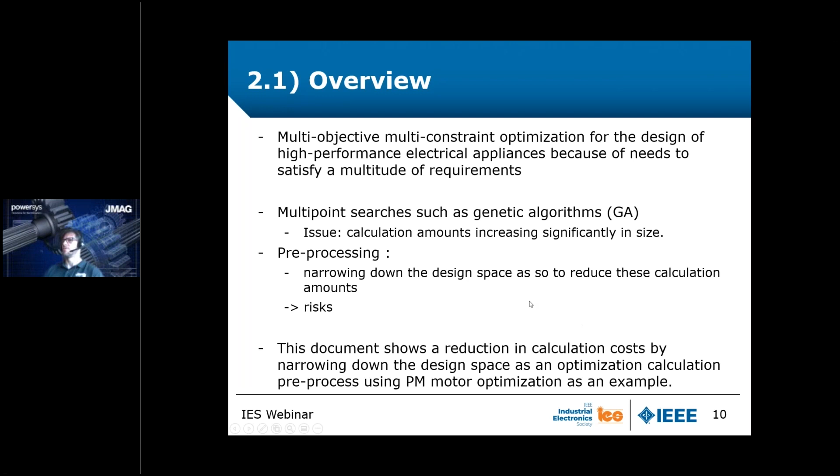So we will see that through an example, permanent magnet motor optimization. That will be our example. So let me show you this motor example. Here is the motor model. So we will make it simple. In that case, only one magnet. And here are all the dimensions we are going to optimize.

So I'm not going to detail everything, but here you can see slot opening, rotor, radius of the stator. Then you can see the magnet width, and also here some space between the magnet and the rotor border. And so here you've got the list of all the design variables. So those are very classical ones, based on classical motor design.

And here you can also see the maximum range that could be used in that motor. And we will see how we can narrow down those ranges here. Let me now introduce the objective function. So still here, it's a kind of classical design for motor. So we are going to maximize average torque, minimize torque ripple, maybe to reduce noise and vibration. And of course, we will try to minimize the loss so that we will increase the efficiency.

Regarding the constraint conditions, in order to make it feasible, we also have something to apply here, like voltage limit. So we are going to check back EMF voltage. We are going to check the stress also in order to prevent damage from centrifugal force. Of course, we will also check the volume because we've got some constraint here.

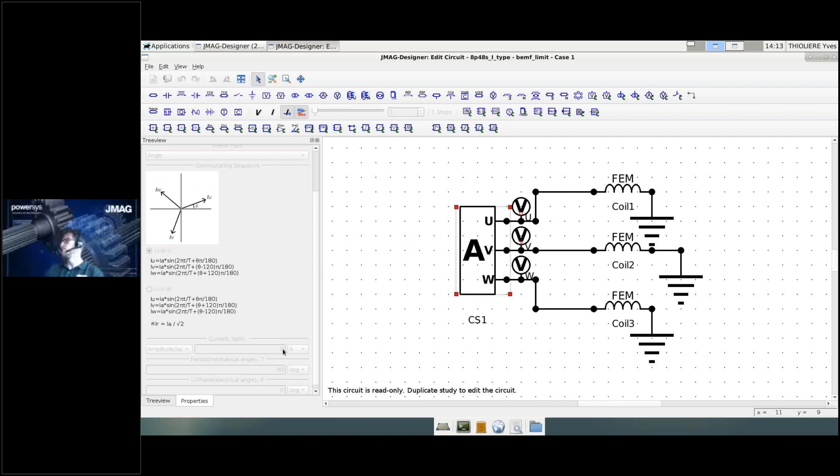So for example, if I edit the circuit, you can see that now I have a current source with 0 current here, so no current. And I'm going to check voltage here. So that's a very classical voltage check. And you can see also that we have here some response graph data checking the back EMF, so checking the voltage.

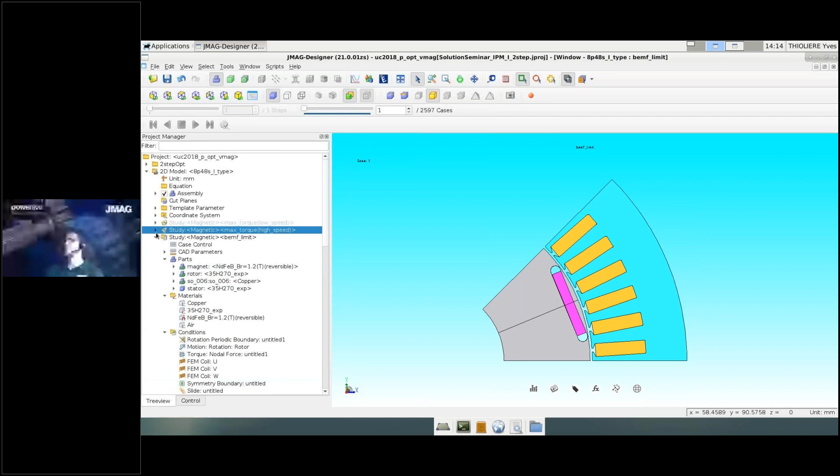We've got one other study, which is for stress. So here now you can see that only the rotor is applied. Here we are also making some response graph data about stress, max stress. So if you check here, edit, we are checking stress and maximum stress.

And that's all our studies, and it's very easy to create those studies, because you can reuse the previous one and change the speed and the current, etc. You can create all your response data, and you can create this analysis group. So you see that in my group, I have all the previous studies I have shown. And in the response graph data, all response graph data coming from all studies are collected here.

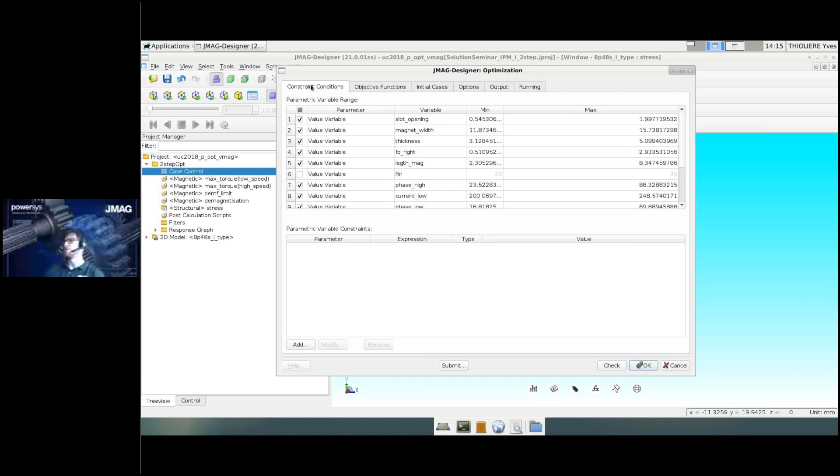So you can see this stress, I showed you back EMF, and of course we've got the ones I did not show you, like average torque for high speed, etc. And on this group, you can directly go to the optimization and place your optimization function directly here. Here first, of course, the constraints with all the ranges, and then comes the objective function. So you can just place there the objective function based on the expression of the response, minimize, etc.

So here is the model. Here is what we are going to play with now in the slide. So let me go back to full screen. So now I presented you the model. I've shown you how I implemented that under JMAG. Let me show you the results.

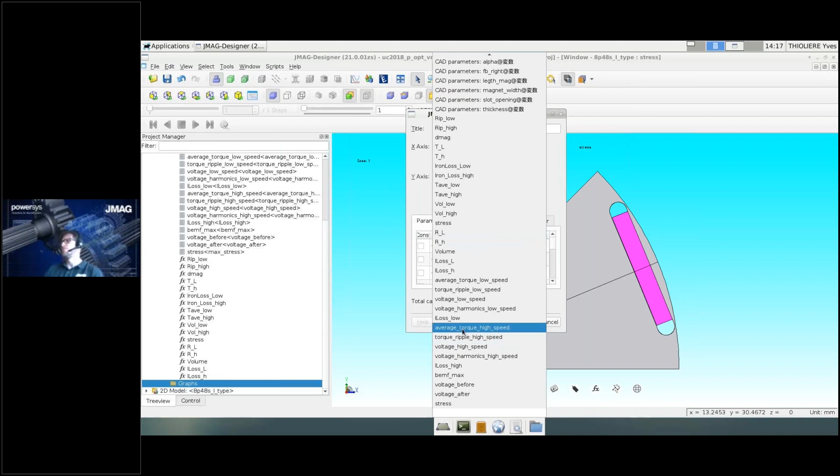So here also in JMAG, you can access all the response graph data and create your graph directly by generating. So for example, you could have all the response graph data that are here, for example iron loss and torque, average torque, high speed. And here you can very easily generate that kind of graph.

So now the question is how to reduce this amount of calculation by getting more solutions in the feasible area, and also updating the Pareto front more quickly. So what is proposed here is to make a two-stage optimization. It means that we will just run one stage, check the variables, check the range of the variables and how they evolve, and use this new range in a second stage. So it means restarting the optimization.

And so we will see that at the end of the first stage, the first stage is in fact five generations of the optimization, and you can see that for this particular variable, which, if you remember, is the distance between the magnet and the rotor border, the range is going down. And you can imagine that you could do that for all variables.

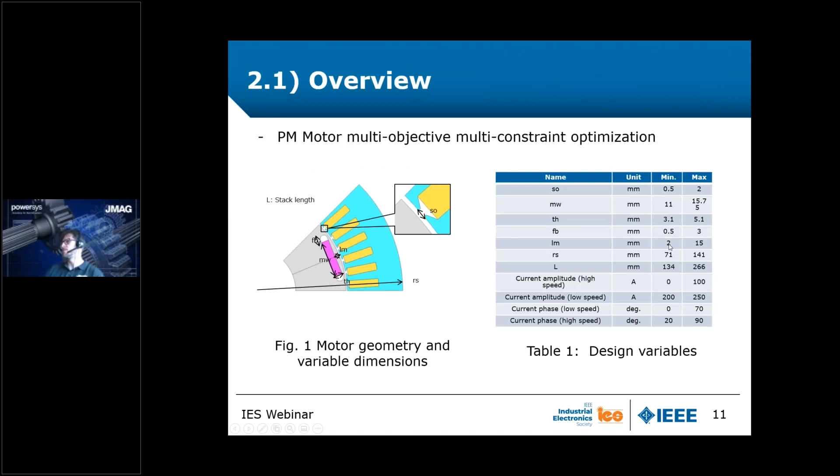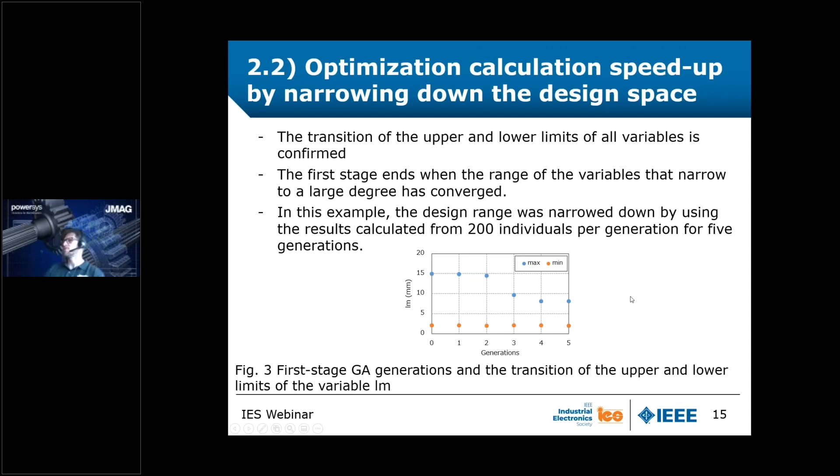And it means that at the end of the first stage, you see here it's maybe 15, here I remember it's 2. If you go back to here, we are for LM at 2 and 15. So we use the full range, but now for the second stage optimization, we will maybe go from 2 to 8, and that will be our second stage of optimization.

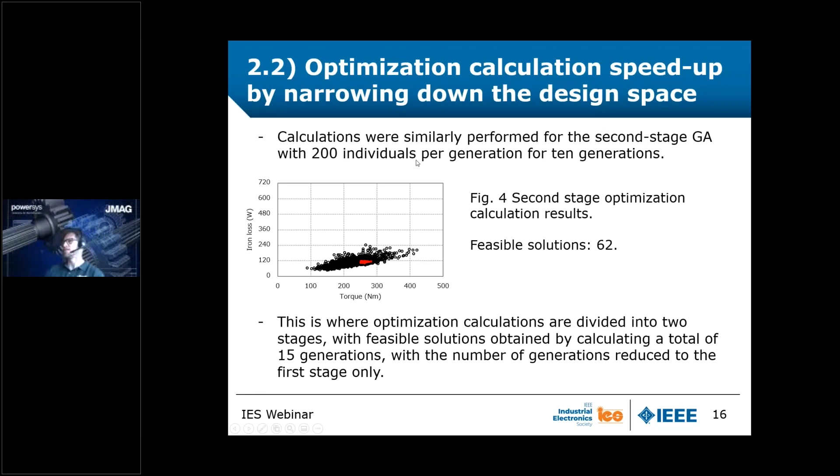And at the end of this second stage, still 200 individuals, 200 calculations per generation, you can see that we've got many more calculations close to the feasible area, and we also update the Pareto front more quickly. The results are not spread away like this. They are really near the Pareto front and really near the feasible solutions. We have fewer solutions, but it's also because we have fewer cases.

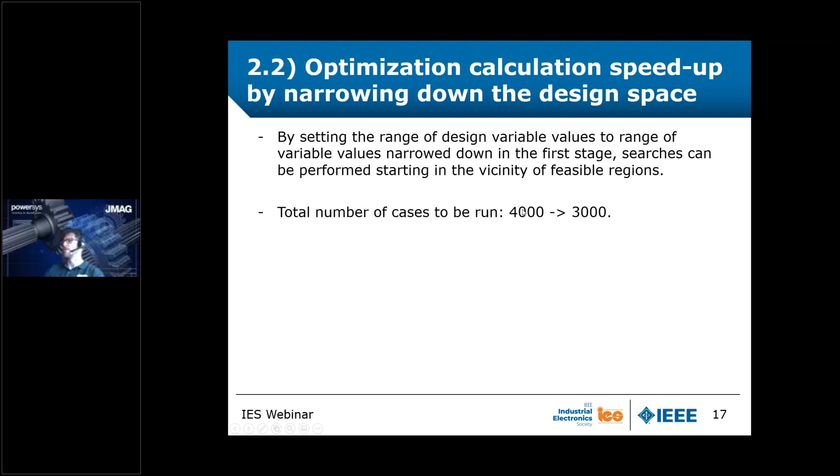This second stage is only 10 generations, so in total 3,000 cases instead of 4,000. So we have reduced the total number of calculations by 1,000, and we also have an optimization which is converging quicker because all solutions are near the Pareto front. Maybe if we ran 20 generations at the second stage, we would get more feasible solutions, but the goal here isn't to get more feasible solutions, but to update the Pareto front more quickly to speed up the convergence of the optimization.

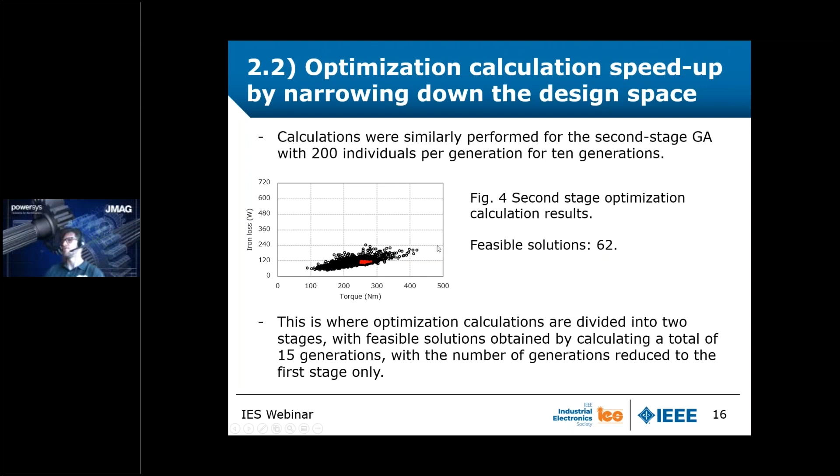So this was by using a finite element calculation. However, you know that finite element calculation is maybe a bit long, so some other techniques could be used. For example, we are now going to use the genetic algorithm using an equivalent circuit model, and we are also going to use the experimental design method using an FEA model. The advantage of this is that the calculation amount is smallest because it's a kind of sensitivity analysis.

We can also have high model detail because it's based on FEA calculation behind, and we can take into account all objective functions. The disadvantage of the equivalent circuit model is that the model detail is low because it's an equivalent model. The objective function is also limited. We cannot implement all objective functions, like torque ripple. The advantage, of course, is that the calculation time is very quick.

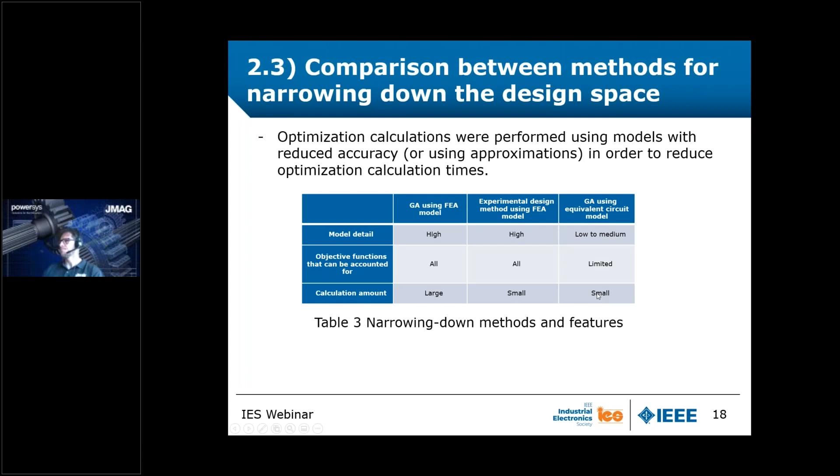So as I already said, with the equivalent circuit, we can investigate high speed and low speed, but torque ripple, voltage harmonics, stress, and demagnetization cannot be taken into account. So what we are going to do is use those new techniques for the first stage only. The second stage will still be the 15 generations, 200 cases, using the full finite element solver.

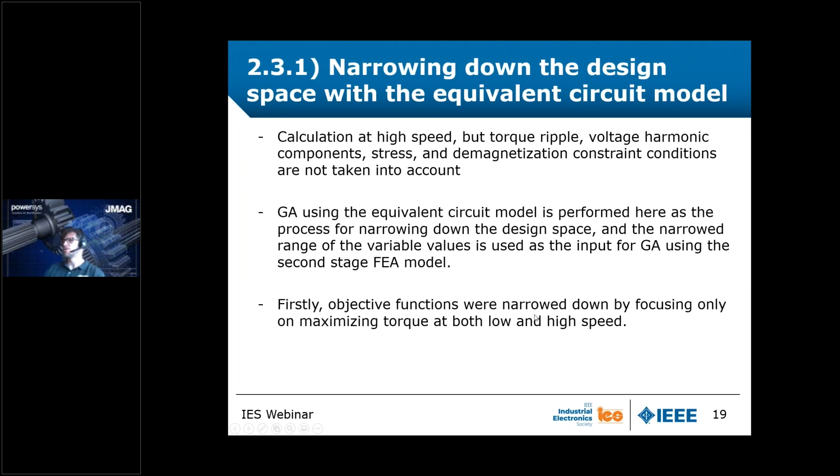Okay, and now we are going to see this equivalent circuit model, okay? And firstly, we will just focus on maximizing torque at both low and high speed. Okay, that will be our only objective function. Okay, and by doing that, you can see that we've got 0 feasible solutions using this equivalent circuit model.

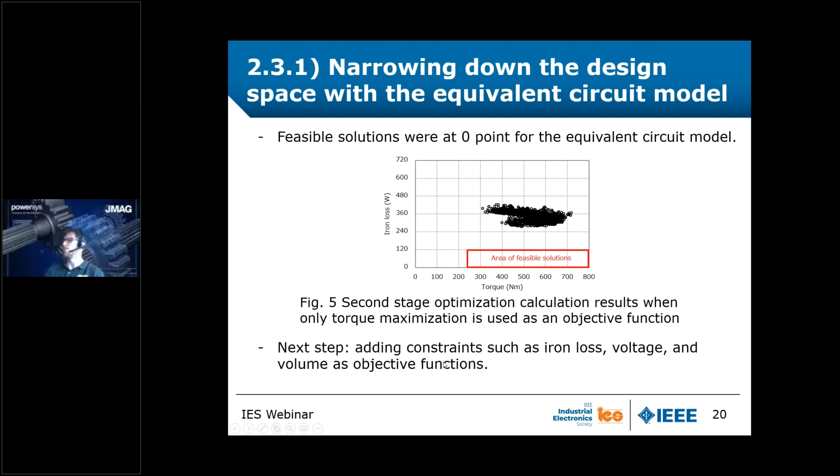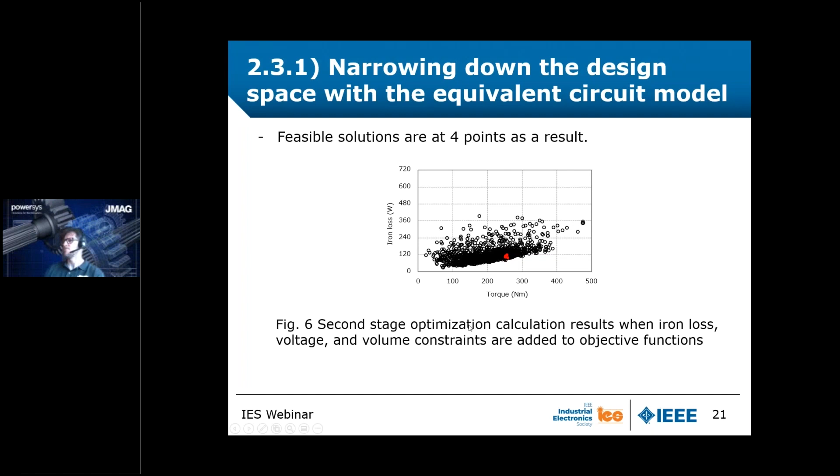So that's why we have very few feasible solutions, because in fact in the first stage the narrowing down is not performed correctly because some constraints are missing and some model details are missing.

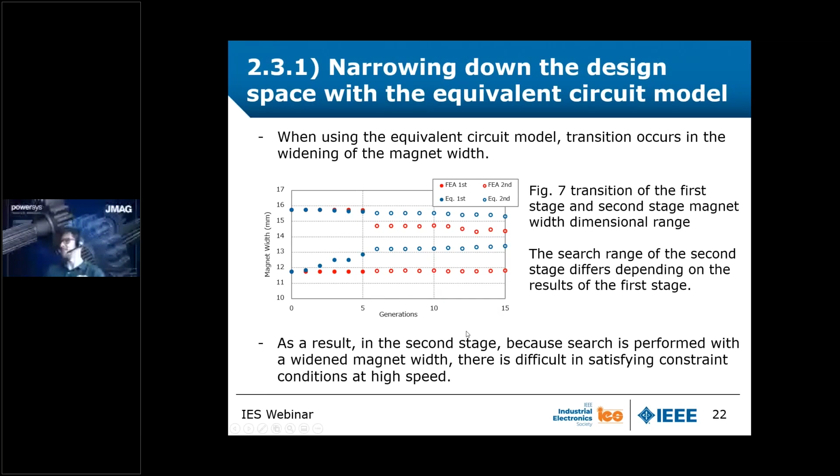The next one will be narrowing down using this experimental design method. So I will make it shorter. It's based on some Taguchi techniques, and it's more or less some sensitivity analysis. This is based on sensitivity calculation. Okay, and the good point is that you can use the full finite element solver behind, and you've got much less calculation to be done.

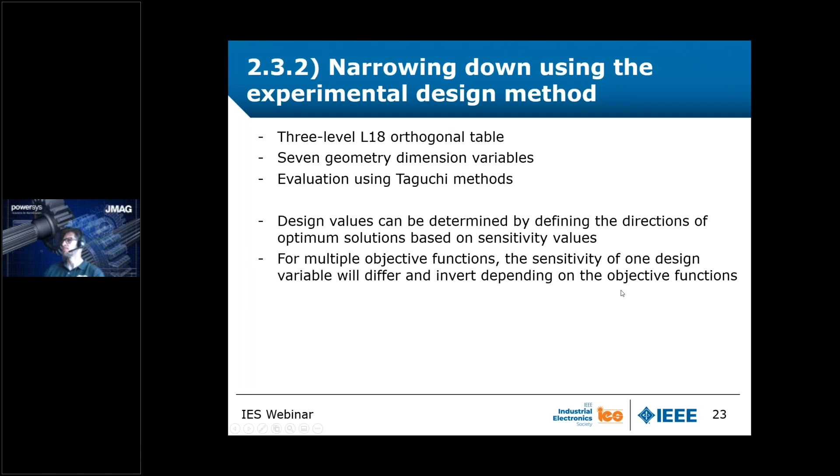The disadvantage is that the sensitivity for one variable could be completely different and also inverted depending on some objective functions. Let's take an example of this variable, still the LM. If you remember this variable, that's the distance between the magnet and the border of the rotor. And now we are checking the sensitivity of this variable. So here is this variable.

We are checking the sensitivity of this variable regarding the torque ripple at high speed and the average torque at high speed. And indeed, you can see that when you are here at, let's say, a small value for the LM, the torque ripple is increasing. But also, when we are at a small value of the LM, the average torque is also increasing.

So it means that if we would like to maximize torque, we will have to be maybe here in that range. Maybe I can make a small drawing here. So we need to be here in that region. So it means also here in that case, and it means that now we are not going to reduce the torque ripple but increase the torque ripple. So it means we have to prioritize, and no single decision could be made. And here again, the narrowing down process is a bit critical, depending on the prioritized objective functions.

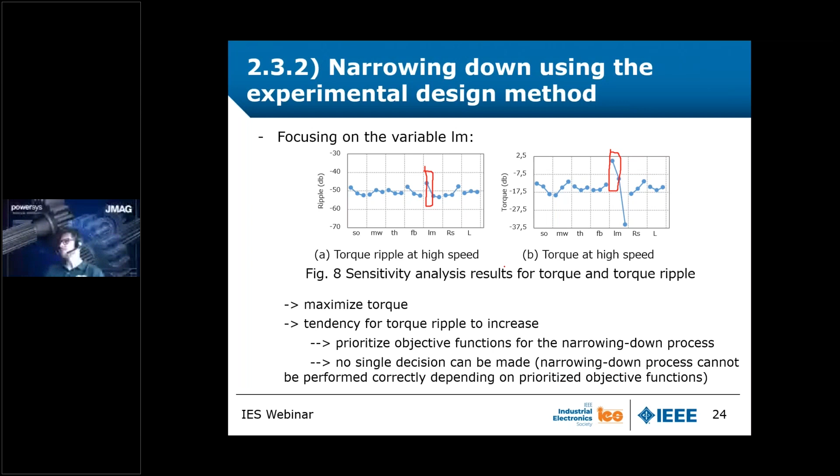Let's have a look, for example, if you prioritize iron loss minimization at high speed. So prioritizing minimum loss at high speed means that here you see the loss, right? Okay, and here you can see that we need to select only this range for all the variables. And then after the second stage, you see that we get some solutions that are completely outside of the feasible solution.

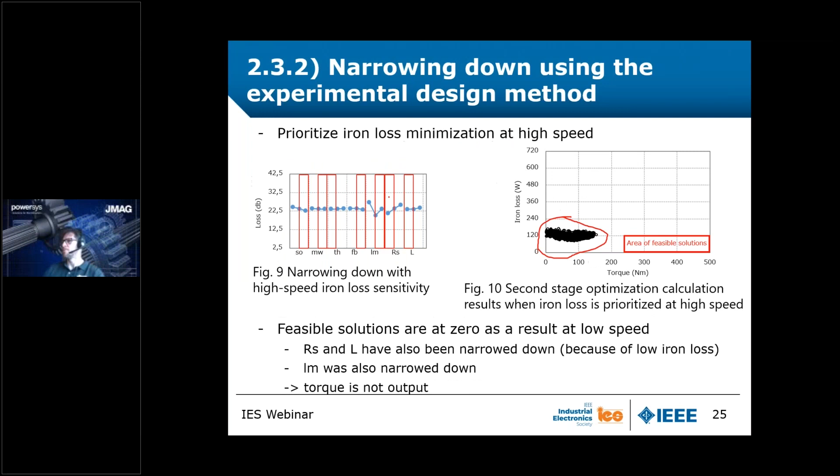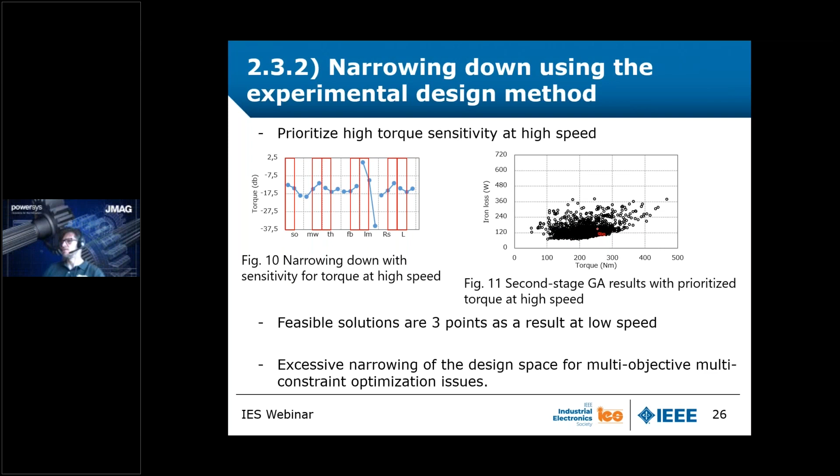So this is also not good. Let's take another example now: prioritizing high torque at sensitivity, high torque at high speed. So you can recognize this picture, which is the same as the one I showed previously here. Okay, so now we will focus on this region here, because you see that torque is high. So we will reduce the range like it's highlighted in red here. And now you see that using this, we have 3 points in the feasible area. So here also we can get some points, but it's not easy doing that.

Here is the cost calculation, and the summary table, which is summarizing everything. So here you've got the initial one. This one is first stage only, I mean, one single stage only. It's the first slide I presented: 200 cases, 20 generations, so 4,000 cases in total. Here we've got in total 5 generations plus 10, so 3,000 in total, and we've got a nice amount of solutions.

And then here come the 2 other methods we have seen, and you see that depending on the narrowing, we could have 3 or 0 or 4 or 0, so it's really not easy using those methods. Using full finite element calculation will be, I think, the best one, and we can get a nice amount of feasible solutions in the correct area. We also have significantly reduced the number of cases and the calculation time.

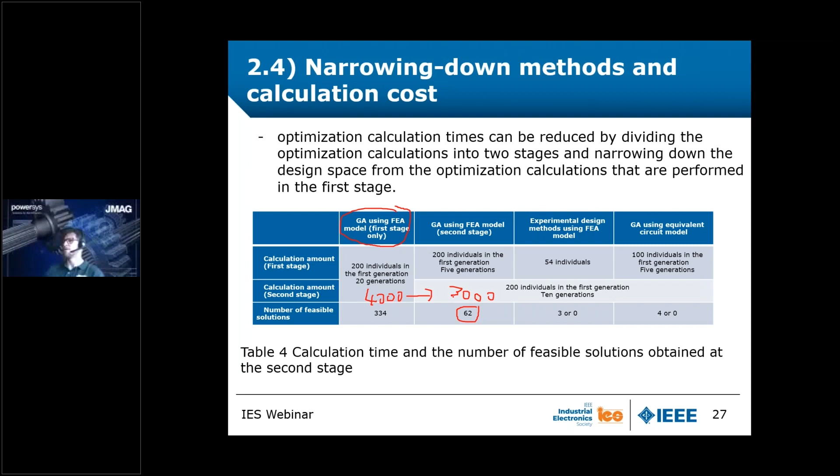So as a summary, indeed, using the equivalent circuit, maybe you are excessively narrowing down, and so no solution. With the experimental method based on sensitivity, maybe you also are not going in the correct direction, so narrowing down is not performed correctly as well. So using a genetic algorithm with the full finite element method at the first stage and second stage, calculation cost is indeed a concern, but with some parallelization on HPC, you could achieve nice results for multi-cases in a reasonable amount of time, and you also get many solutions in the feasible area.

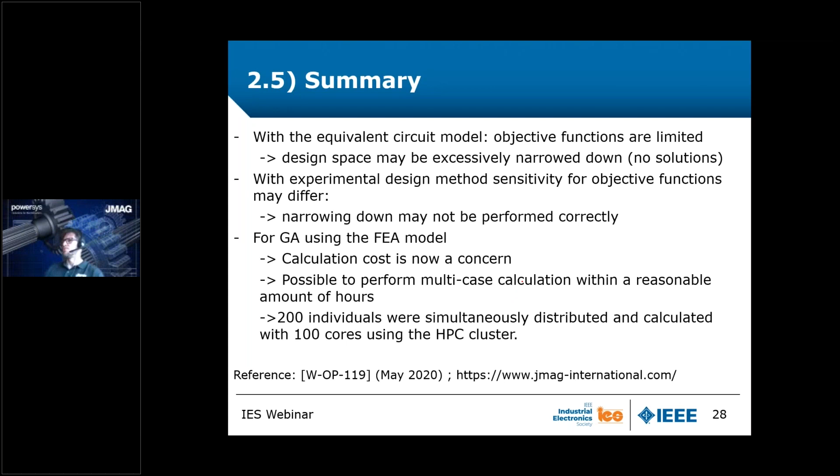Now we are going to part number 2. We will go into more details and case studies, and we will talk about topology optimization, which is also a bit different.

Yes, thank you very much, Yves. With your first part of the presentation, you made my life much easier than I was expecting, so I can directly jump into the case studies. I think you see my screen fine, and you can hear me, and hopefully see me as well. Yes. Great.

Okay, so following the case study and the basic methodology presented by Yves, I will start with 2 case studies that are still using this parametric kind of optimization, still using the genetic algorithm. And after that, I will show you a case study which moves a little bit from parametric optimization more toward topology optimization. In this case study, we focus on the NVH aspect of electrical machines. To give you a little bit of background on the design process that we go through here.

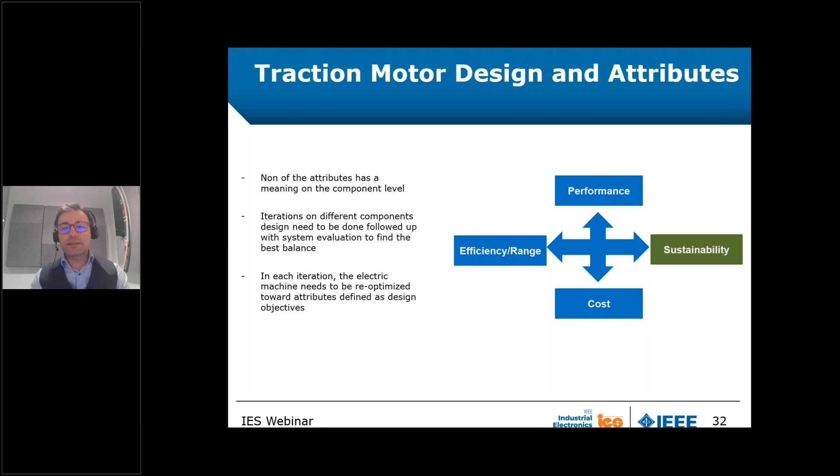Basically, what we are trying to do with this design process is to find the right balance between performance, efficiency of our product, which influences the range of our vehicles, the cost, and a parameter that is getting more and more important, which is sustainability. If we focus today on sustainability, we have some specific parts and components in the electrical machine that have more negative impact on the sustainability of our product.

So that's why in this presentation, I'm going to show you 2 case studies where we made the design. In the first case study, we tried to reduce the amount of rare earth permanent magnets, and in the second case, we tried to replace the copper hairpin with an aluminum hairpin to again improve the sustainability of our product.

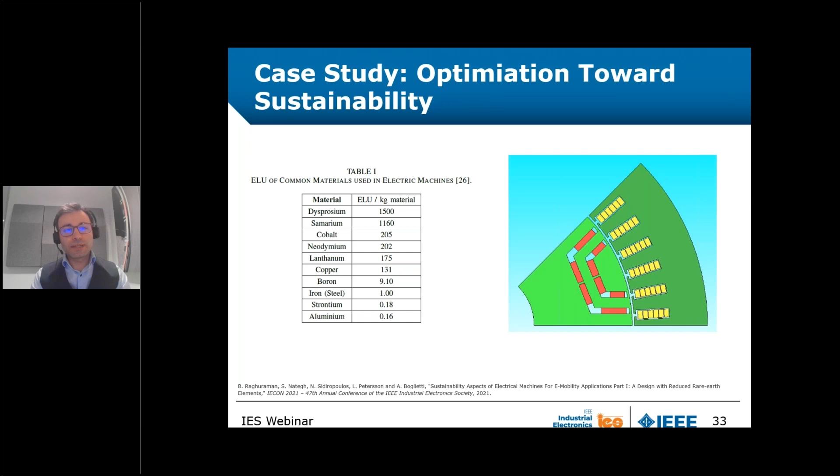Let me show you a little bit of the process we go through. Our whole design process is made in JMAG, but we use different JMAG products for different reasons. Normally we start with initial dimensioning of the motor, and that's normally done in Express, but that's not the only application of Express. We also use Express to have a start point for making the design template that we want. So we get the design template, which is normally fully parameterized, from Express, then we put it in JMAG and further customize it for the kind of optimization that we are going to run.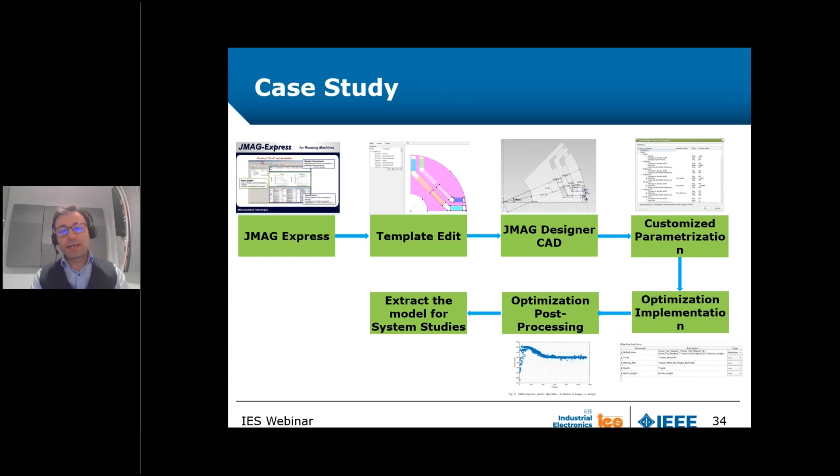This further customization can be to fix some parameters, or, most of the time, increase the number of parameters that we would like to vary during the optimization process. Then we get the parameters that we want to have as constraints and objectives, list our objectives, run the optimization based on a genetic algorithm, and then make the Pareto front, the process that was very well shown by Yves. So let's look at the first case, where we are trying to reduce the amount of rare earth magnets or rare earth elements in the magnets.

The rotor topology normally used for reducing the amount of magnet and replacing at least part of the rare earth magnet with, for example, ferrite. There has been a lot of development on magnets without or with a minimum amount of rare earth elements, but here for simplicity we just go for something well known, which is ferrite. This double layer U shape rotor topology allows us to have different magnet types in the center and on the sides, and that is helpful. If you compare it with the V shape, one layer or two layer, if you make them different, it will create an unbalance between the flux on the two sides of the pole, and that's going to be problematic.

So this rotor topology fits very well when we try to reduce the amount of rare earth magnet in our design. During the optimization, we will focus more on meeting the performance requirement at high torque. Then we have the efficiency points that are more towards lower torque and mid-range speed, as you can see in the graph at the bottom, which shows the real operation of the electrical machine inside the vehicle. You can see it rarely goes to peak performance. So this region shows where we should do the optimization toward efficiency.

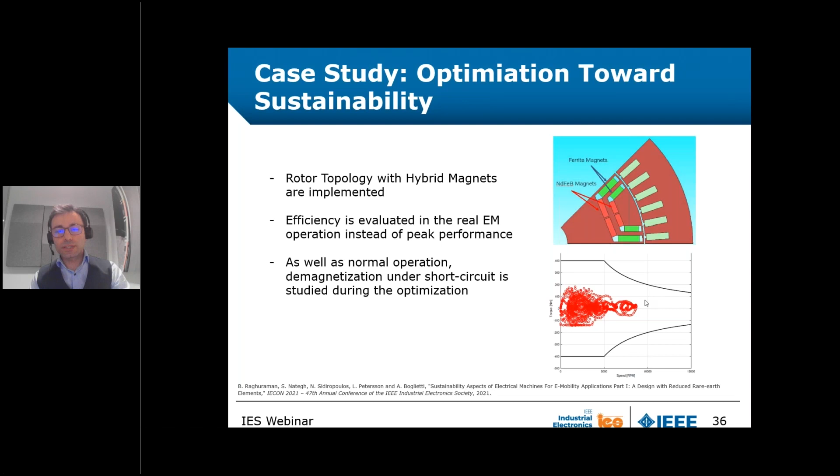So this is not really the full list. Normally we work with a much higher number of objectives, but this is representative for this case. If I increase it more, it can be complicated and a little bit harder to follow. So this is an example. So we run the optimization here. This is an optimization with something like 1150 cases.

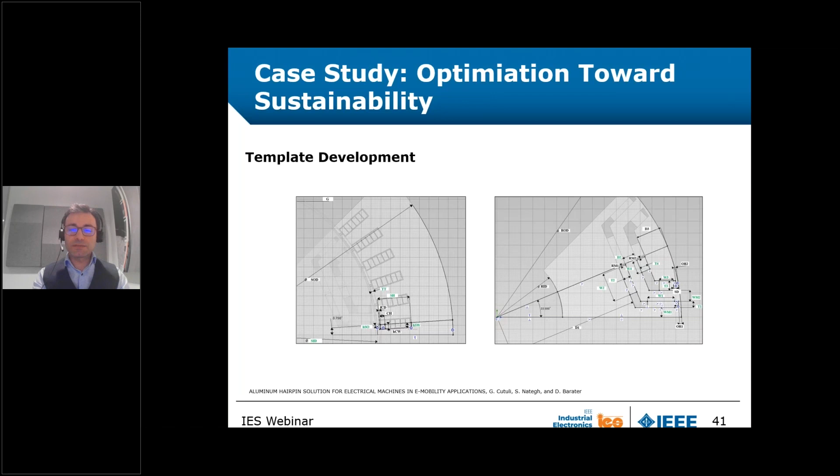We put the objective. The objective will of course be different here, because it is very important for us to keep the current density in the slot below some level, because we know if you have the same current density in the aluminum hairpin as in the copper hairpin, you are going to produce much more losses. So that's why we need to control the current density. Then we try to minimize the total losses, which is the sum of the joule and iron losses.

We would like to meet the voltage requirement based on the state of charge of the battery, for example, and the level of power that we want to get. And we would like to meet the torque requirement, and we want to minimize the amount of magnet at the same time as replacing the copper hairpin with the aluminum hairpin.

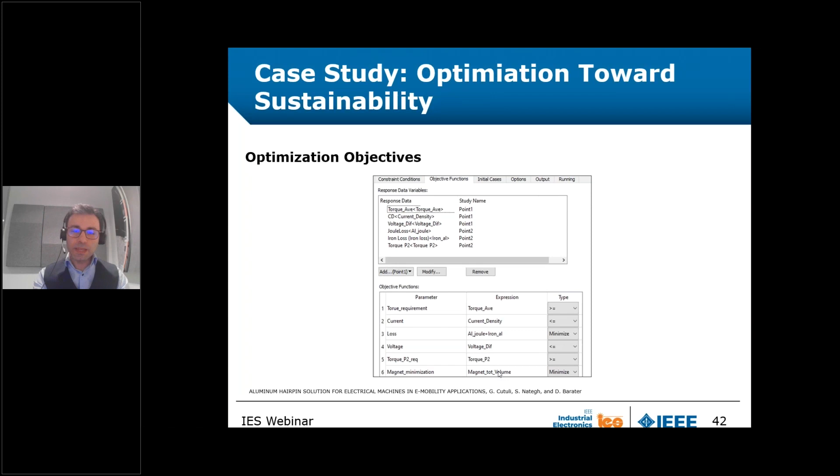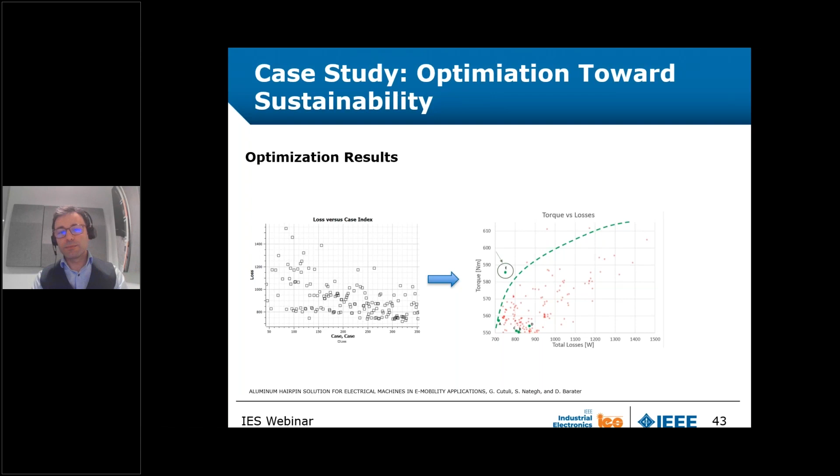You can see the same optimization process is run. In this case, we didn't really need to run it for a very high number of cases. This case shows something like 350 cases, much less than the case I mentioned before. And then we made the Pareto curve, and we tried to find the most optimum design that we felt comfortable with. We could get the design that we want.

So normally after this optimization, you run some smaller optimizations with a lower number of cases to further optimize with a smaller range of the constraints. But this shows the design that has been achieved in this case. And then there will be a study on the system level, together with the amount of current, for example, that you need for the design, to get the sustainability and LCA picture of the whole system.

In this case, it may not be very successful because, as you can see, the amount of the magnet was increased, and that actually killed a lot of the benefits that we had by reducing the amount of copper. But in terms of the optimization, it went pretty fine.

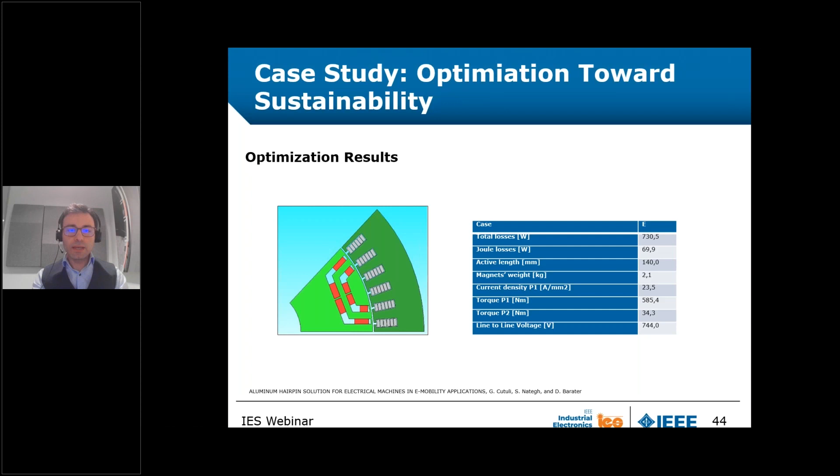Now, these were all still on the parametric optimization level. Now I'm going to show you a case where we move from parametric optimization to topology optimization. And normally that's the process we use when we go deep into the detailed design of the motor, when the concept is finalized and we are going to do the detailed design of the machine.

When it comes to detailed design, you need to fix all the barriers, because we know small changes in the barriers will influence the tooth forces in the stator, for example, and that will generate noise in the machine. So in this specific case, we didn't have much possibility to redesign the whole machine, but with minimum possible changes, we wanted to improve the NVH and the noise level of the electrical machine. The reason was that the electrical machine was already on the vehicle and we couldn't redesign everything.

So just a little bit of background on topology optimization. What does it really do? Topology optimization is used when you really have difficulty doing the parameterization.

Imagine you want to optimize one barrier, for example, in the whole design. Depending on what kind of parameterization of that model you have, you will still limit some design possibility. So that's why, instead of selecting some part, fully parameterizing it and letting it run in the optimization process, in this topology optimization we just select the area that we want to optimize. And then we let the software give us ideas on the best possible design for that barrier.

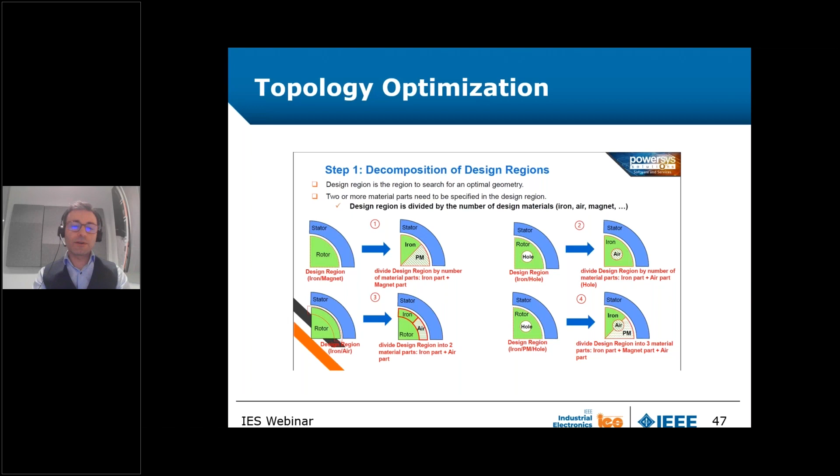The way the software works basically is that for that specific area, it will pick up elements, and with some level of resolution, it will exchange the material with air for different combinations, and it tries to find the most optimum shape of the barrier. This is the case study that we had. As I mentioned, we wanted to keep the same rotor and stator lamination because maybe the tooling was ordered. It's quite an interesting case.

The only possibility that we found to improve the NVH and the level of the noise in the machine was to change the shape of this central barrier, as you can see here. This is the original shape of the central barrier. When we did the detailed analysis of the noise from the machine, what we learned was that the order of the tooth force originating that higher noise is order 48. We know this is an 8-pole machine with 48 slots, so order 48 plays quite an important role here.

So we needed to set some objectives and constraints around this optimization. As I said, the motor was already produced and already on the vehicle, so we couldn't change the performance much, so we limited the change in performance to maximum 1%. Then, in the second objective, we wanted to minimize the value of the 48th order harmonic on the tooth force. At the same time, by reducing order 48, we didn't want to compromise on the other orders, so we wanted the sum of all the important orders, which can be 8, 24, 48 and 56, to still be minimized as well.

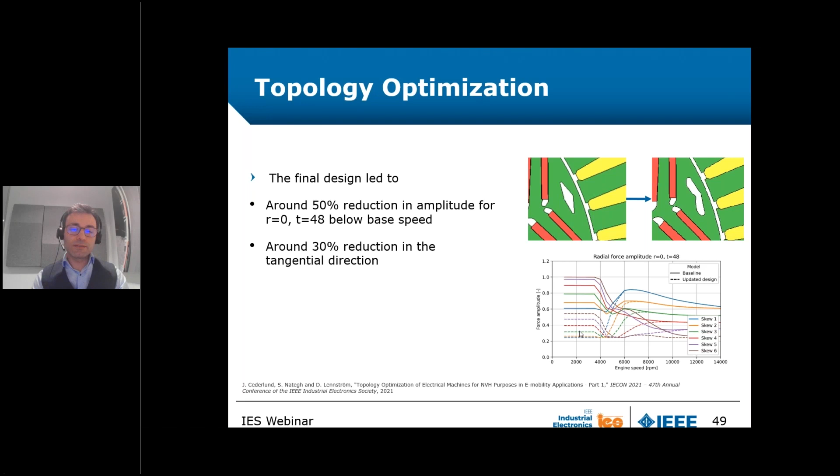Another very interesting thing was that our calculation and the whole design and evaluation process was very much matching our measurement results. So not only was it representative for comparison, but the absolute value was also quite well estimated. That was a good sign for us, and that made changes in our design. This is already implemented in one of the most sold electric cars within our group. When I'm referring to the group, I mean the Geely group. This was not specifically done for Polestar, but for Volvo Cars.